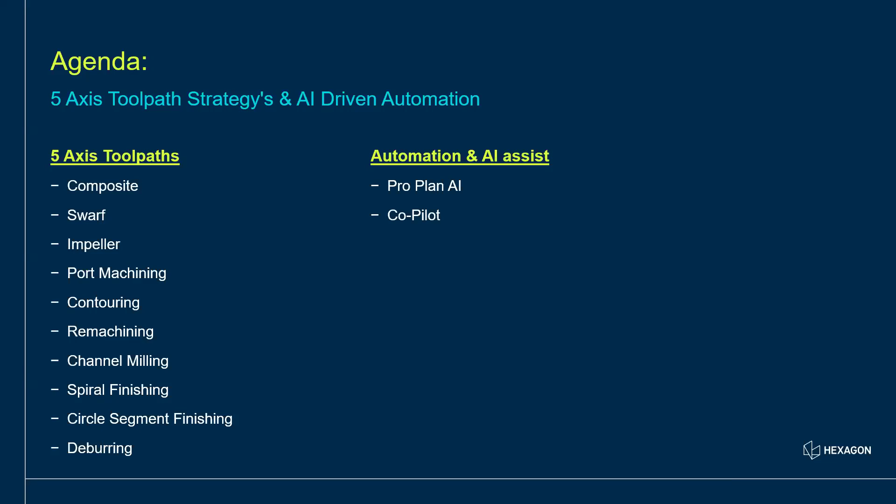ESPRIT EDGE will have a version every year. We used to update 3 to 4 times about the versions. So already we have released 2026.1. This is the latest update, 2026.2.

This is Copilot Execute. It will extend the Copilot capabilities beyond recommendations and subject matter expertise, and it will enable the execution of ESPRIT EDGE commands using natural language prompts. For example, if you want to import any 3D model or any fixture, if you just type it, it will directly go to the particular location and import the model into the ESPRIT EDGE environment. These are just some basic examples—there are a lot of functions in the background. This is the basic thing I just explained, how Copilot is working, so that people can understand easily.

Okay, this is how Copilot is going to help them. There are a lot of search terms we used to do when creating programming, but this Copilot is really helpful, and it will save a lot of our time.

The benefits of this is it will reduce the learning curve for new programmers, and also accelerate the part programming. The main criteria is who needs it. New ESPRIT EDGE users unfamiliar with the part workflows can start using the Copilot and get things done sooner, without needing to search here and there. It also helps experienced users seeking enhanced productivity. If they're doing programming that normally takes 30 or 40 minutes, using this Copilot execution, they can reduce the programming time drastically by 50%. In that perspective, it's really going to help them.

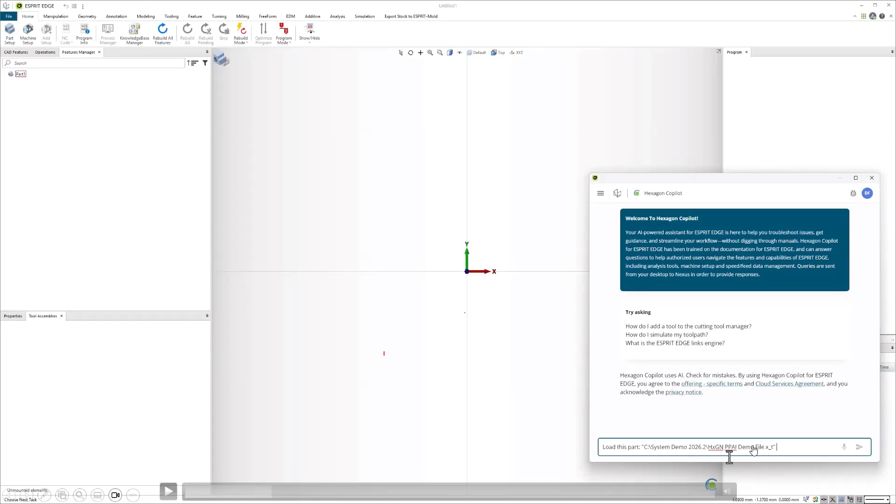Here you can see there is a message we are going to type: load this part, and we are just giving the location. So you don't need to go to the part, you can just give the location and load the part. You give the program file location, and once you give that, it will directly go to the location and import the model into ESPRIT EDGE.

Yeah, you can see here. So these are all some basic things which can be helpful for new programmers or experienced programmers to enhance their productivity.

And also you can do further executions. Set the nexus material for part 1, aluminum. We have some automation inside based on the material selection. If you type those commands, the background execution will start happening, and within maybe 40 to 50 seconds, the next execution will happen. It depends on the query, what we wanted to exactly achieve. In case there are sub-questions, the AI Copilot will ask those questions and we will answer them.

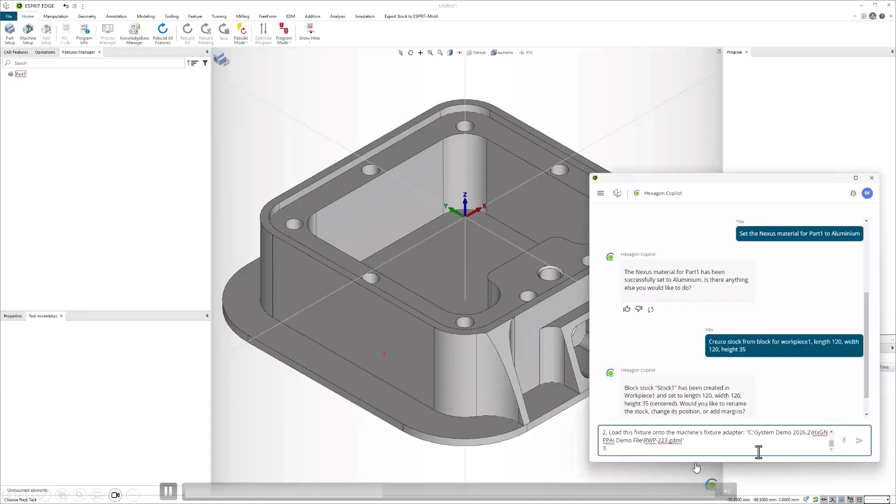So we are just typing: load this machine, load this fixture, everything. We are just typing and giving the location. Once you give everything, this is the command prompt we have given to the Copilot, then automatically the execution will happen. Yeah, this is how it will work, the Copilot will work.

And also you can upload the workpiece, and also you can upload the fixture, everything, stock material.

So far we have seen the Hexagon Copilot features. Whatever commands you enter, based on the commands it will do the execution at the back end and you will see the result.

The next thing is run ProPlan AI. ProPlan AI is an automation AI assist. Based on the database or the best strategies available in our database, ProPlan AI will help implement the strategies. The only thing required is feature recognition. ESPRIT EDGE has a feature recognition software, so it will recognize the feature from the 3D model, and based on the 3D model, the execution will happen. I will just show you that.

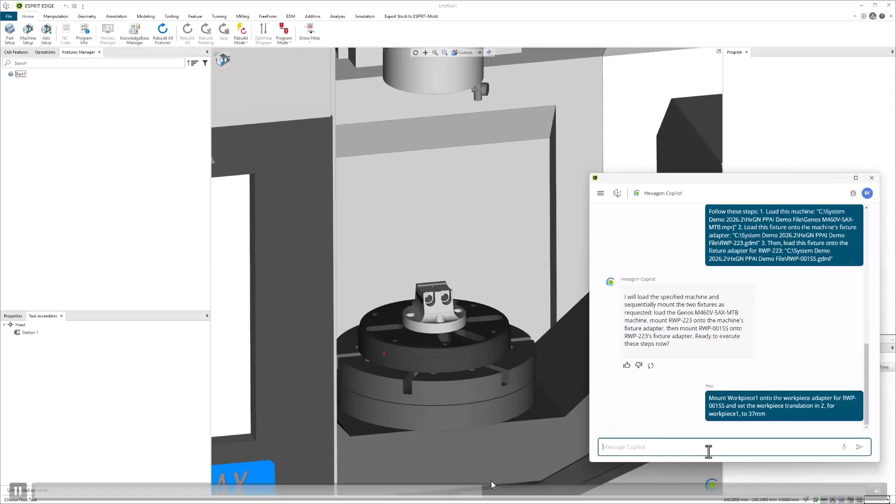Once the workpiece, fixture, machine, everything is set, we can ask any questions like create a pocket feature with the face selected, and create a wall feature with the side face selected. Any question you ask, it will do that automatically. You don't need to do it completely manually. In case you get stuck somewhere, this Copilot will definitely assist you on what to do next. So in that perspective, it is kind of our first point of contact to get immediate support.

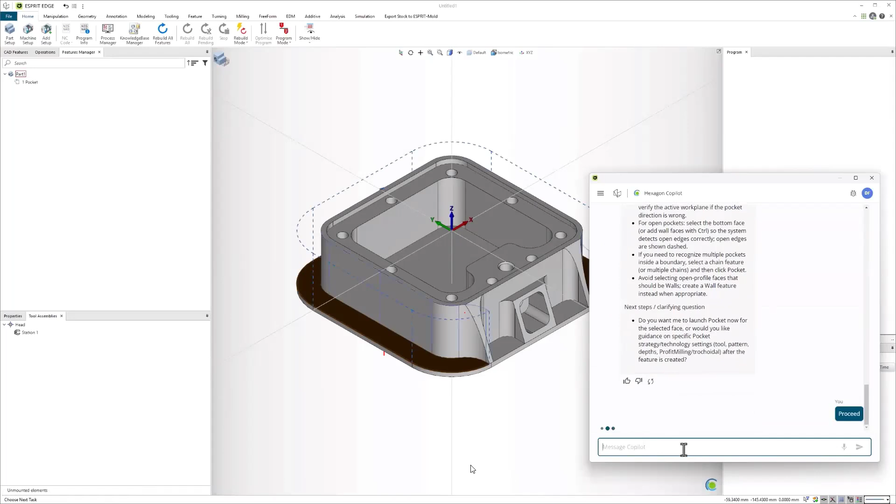So now the feature has been created, some pocket feature. We have given the options in the Copilot, and Copilot has helped now create the feature. Now we are saying run ProPlan AI on the selected features. ProPlan AI is an AI automation inside ESPRIT EDGE. Once you run ProPlan AI on the selected feature, it will work at the background and the toolpath will also be generated automatically. In this section, you can see the toolpath has been generated on the left side also - rough general pocket and finish general pocket. So roughing operations as well as finishing operations have been generated over here.

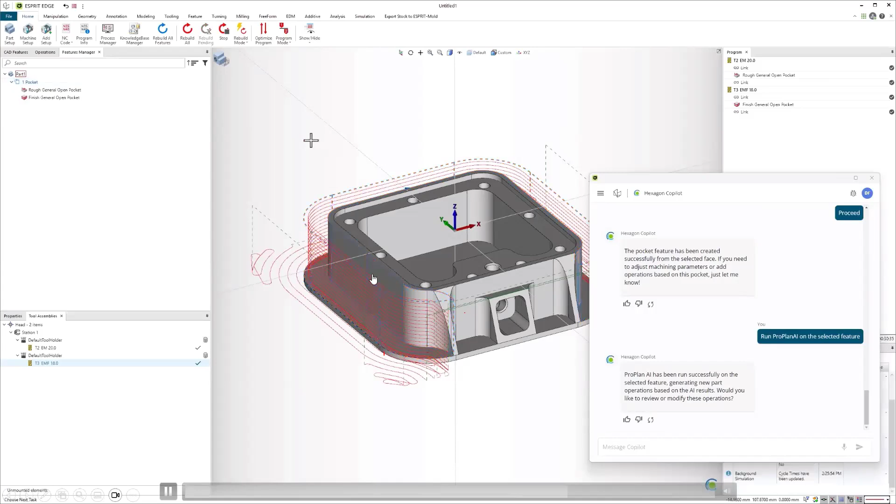Then you can directly create the toolpath. You can see this process from the initial to the final toolpath and then the simulation stage. So nothing has been created manually.

So it is like, you are importing the part, importing the fixture, selecting the tool, creating the feature. Everything happens based on the commands you have entered in the Copilot. So this is how the ESPRIT EDGE automation of ProPlan AI and the Copilot will work together to get it done without any manual intervention. The only thing is we should know what we have to achieve. Once you are clear with your strategy, you can execute the same in the software itself.

So you can see the simulation after that. In case if there's any changes required, you can edit the toolpath and do that. Since it is already a proven database, you don't need to do any NC code. After this, you can type like, post NC code for this post and save it in this particular location. We are giving the location for the post also. So it will directly go to the folder and then select the post processor. And finally, it will generate the NC code like this.

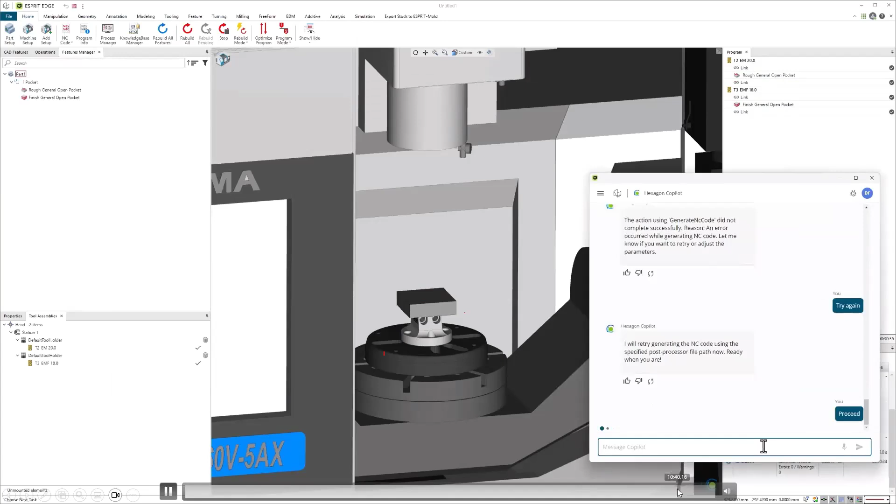So this is completely a workflow of the ProPlan AI and then Hexagon Copilot, how it is really going to be helpful to reduce the manual intervention. And even though if we get stuck somewhere, we can use the Copilot. This is the thing I wanted to execute. So they will give some suggestions, and based on that, we will continue our programming.

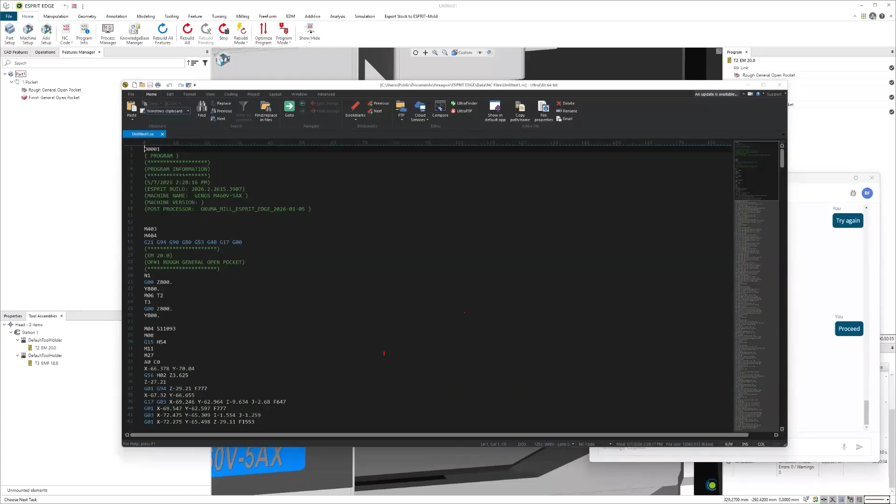So these are some features, some advantages we have in ESPRIT EDGE 2026.2. Optimization of cutting conditions and then 5-axis composite new patterns. We have that dynamic cutting condition - we have introduced the dynamic cutting optimization. It will adapt the cutting conditions to the machining context. For example, it brings shorter cycle time and better tool life.

Already in ESPRIT EDGE, we have the feature called profit milling. The profit milling will remove more material and it will reduce the cycle time and also increase the tool life as well. Similarly, in cutting conditions there is optimization based on the surface, based on the profile - the toolpath will get automatically changed.

That is what we have introduced in the latest version of ESPRIT EDGE 2026.2. And also when it comes to 5-axis composite new patterns, this update introduces 3 new machining patterns that expand the range of part-driven toolpath, enabling simpler workflow and greater control. Sometimes we used to have contour variable offset, open flow, central pass variable offset.

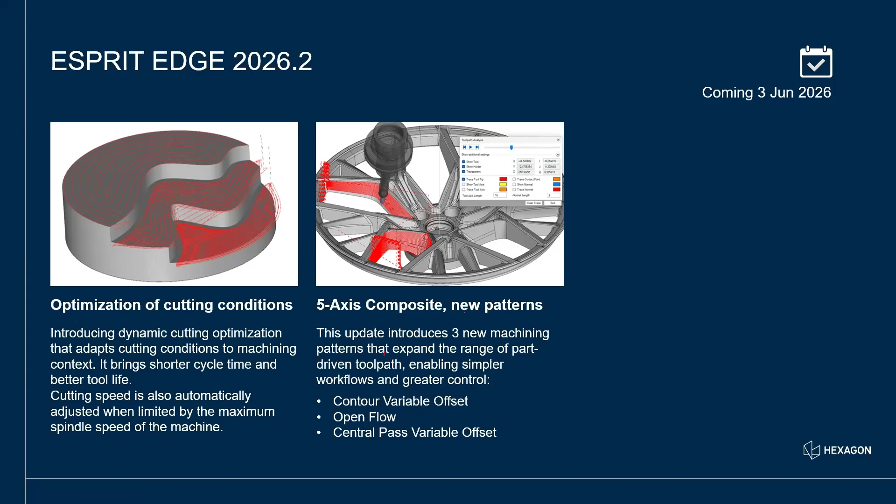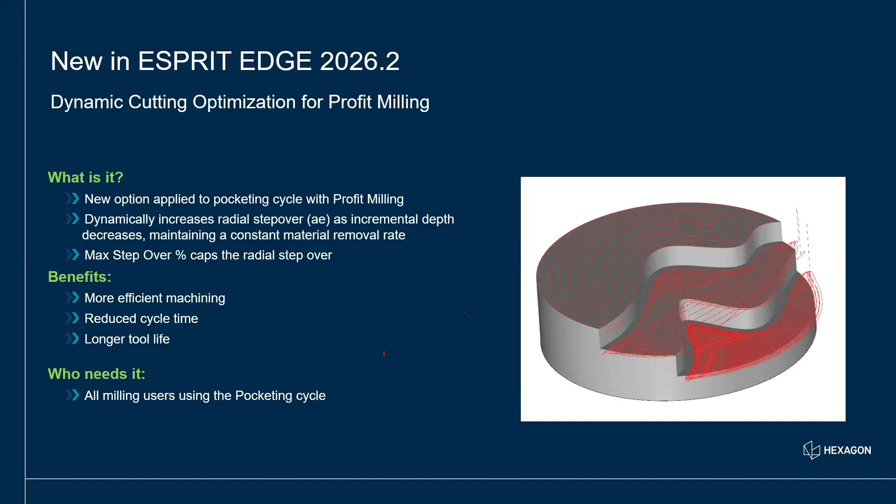And this is the dynamic cutting optimization of the profit milling. I just explained this, what are all the benefits you can get. It will generally give more efficient machining time, reduce the cycle time, and give longer tool life. I just explained this, so let me go on.

And the same way for this 5-axis composite with the new open flow and hybrid patterns.

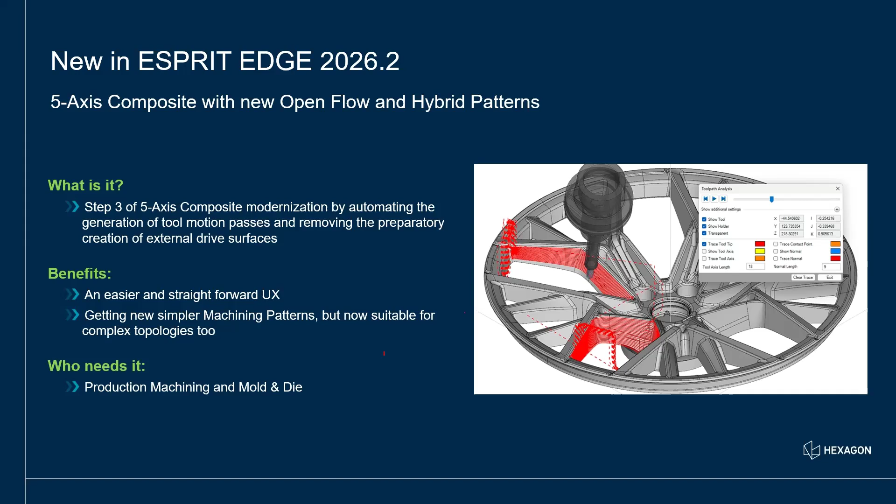So now we have seen so far about the ESPRIT EDGE new features, what is available, and how it is going to help them. As I mentioned in the first slide, we have different 5-axis strategies, like channel, swarf, and impeller. I will show some workflow and ESPRIT EDGE files, so that you can easily understand how it is easy to create the programming, and how the expected toolpath also you can easily achieve through these options and features.

So this is the software UI UX interface. I'm just going to load the part.

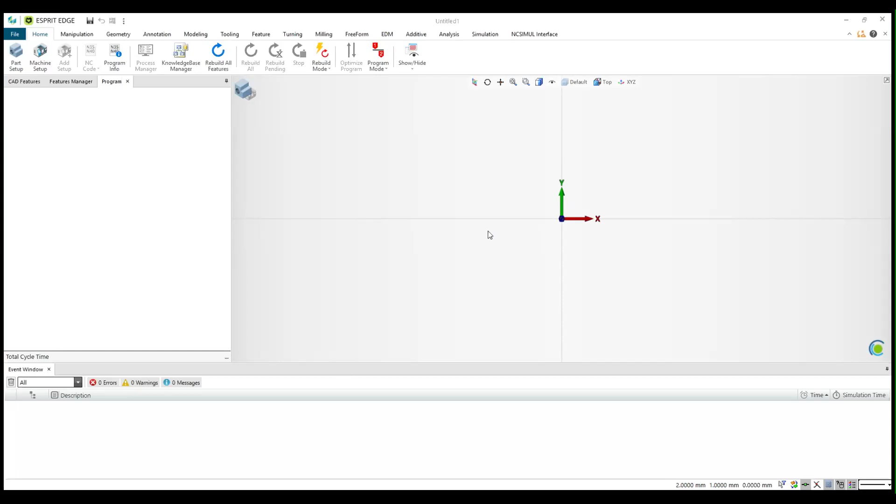So this is the ESPRIT EDGE UI UX interface. Let me open one part. Okay, channel roughing.

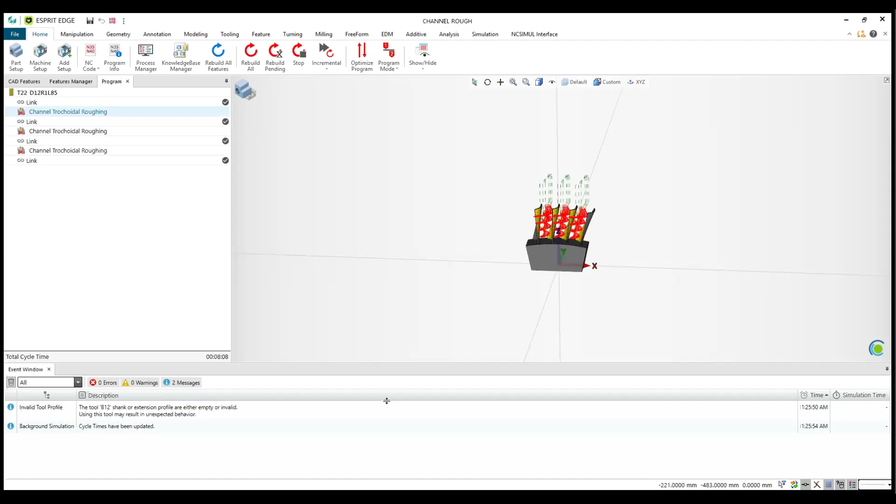So this is the one part which already has the toolpath created. If you see at the top in milling, we have individual operations like facing, pocketing, contouring, and deburring. These are all some basic 2-axis and 3-axis profile operations available inside ESPRIT EDGE. When it comes to free form, mostly these are the options useful for 5-axis machining. At the top here you can see composite milling, swarf machining, 5-axis contouring, remachining, channel milling, impeller, 5-axis spiral finishing, and we have both roughing and finishing. Similarly we have port roughing and port finishing, circle segment finishing, and deburring. These are all dedicated cycles available for 5-axis.

So whenever we want to do any 5-axis part, this will cover almost 100% of that machining requirement, because mostly when we are doing an impeller part, you can directly go to the impeller option. When we are doing a channel, you can go directly to channel milling. So if you take this part, this is channel milling. In that channel milling, we have roughing operations and also finishing operations. So first we have done the roughing operations.

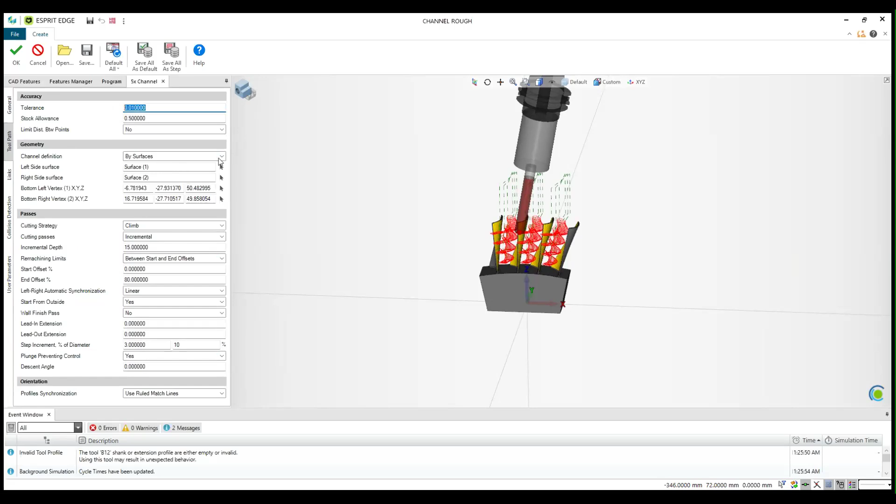So basically we need a surface to create any toolpath. For that, to create a surface in ESPRIT EDGE, we have options to create any surface. With that surface you can select the area, by ruled features or by surfaces - you can see here that yellow color, we have already created the surface. With that we have created the toolpath. And the links - link is like how you want to approach entry, exit, and what clearance you want to have. And if there is any collision, tool detection collision also you can activate. And if there are any user parameters, that can also be added.

So this is completely inside a strategy. If you select any particular toolpath strategy like channel milling, you have all these multiple options, but very minimal input. So the main advantage of ESPRIT EDGE is you can use minimal input to achieve your toolpath. It's not much complex like other softwares I used to use. So you want to do channel milling, you can directly go to the channel milling options and enter that data. But we have some criteria before that - you have to create the features.

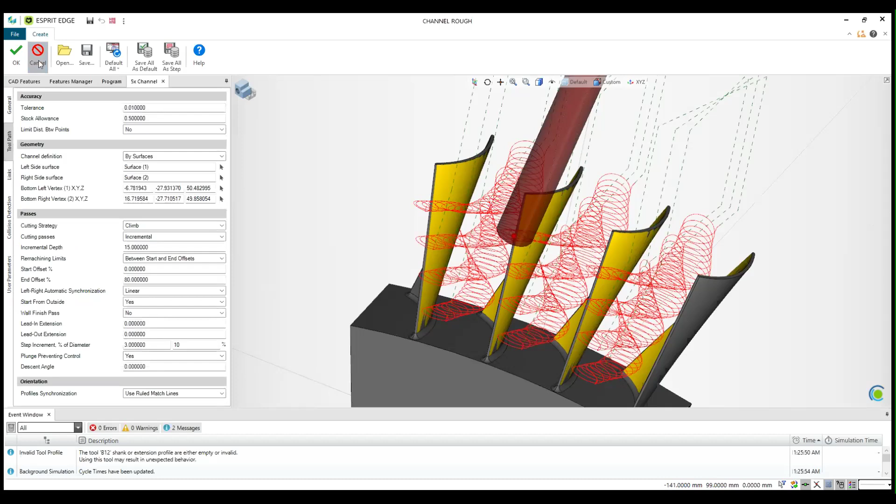But those things are very easy, not much complicated. There is an option in the geometry or modeling section. Here, whatever features or surfaces we want to create, we can easily create. Even for surfaces, we have a lot of options to create them. So from that perspective, toolpath creation is very easy, and quickly you will get the required toolpath that you wanted.

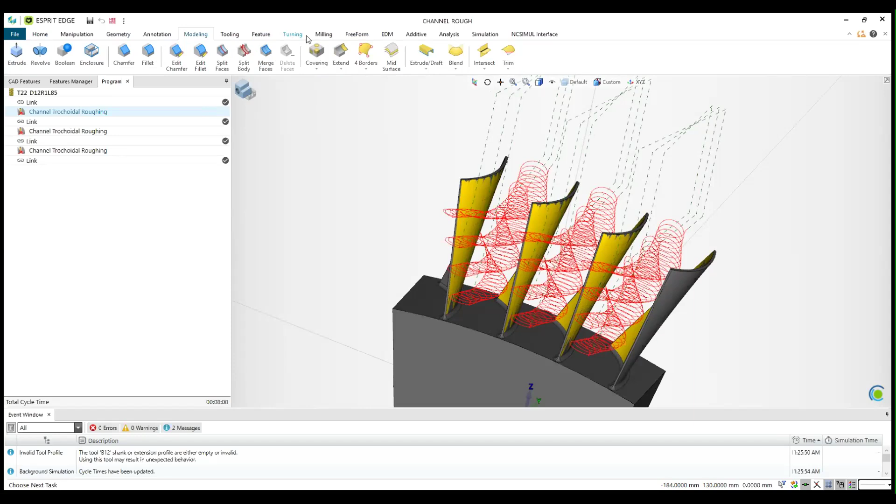So channel milling, as I said, I just went and selected the channel milling. I entered all the parameters, whatever is required, and once you click OK, you will get the toolpath and the simulation.

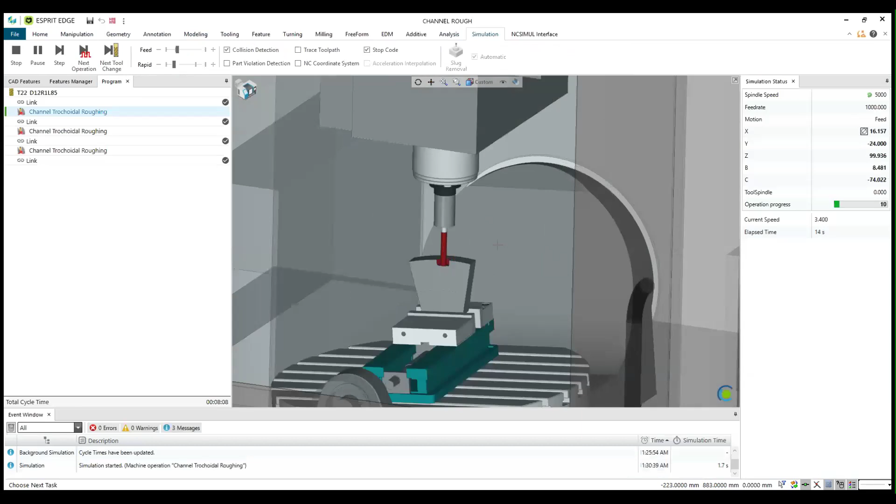Let me click the simulation. So the graphics of ESPRIT EDGE are also very clean. You can see the real, clean and perfect toolpath simulation.

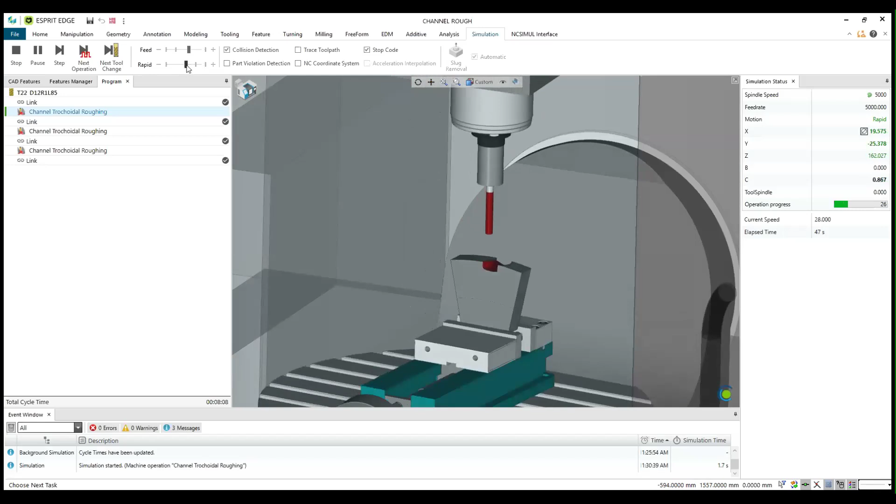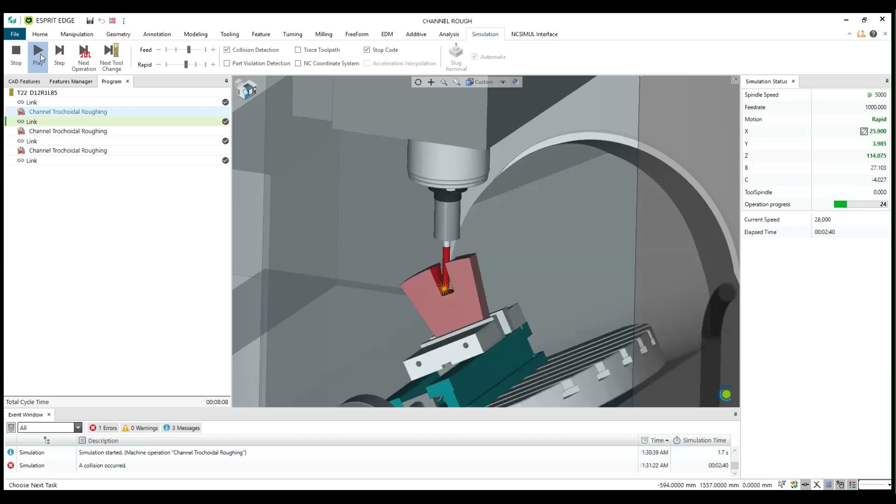Another plus point for ESPRIT Edge is that we have a post-processor library. Generally, if you want to create any toolpath for newer machines, the CAM provider has to build the post-processor, and if there are issues or modifications needed, they have to work on it. But in ESPRIT, we have dedicated post-processors available in our library, more than 30,000 already available and ready to use. No modifications are required. You can directly download from the portal and start using that post-processor.

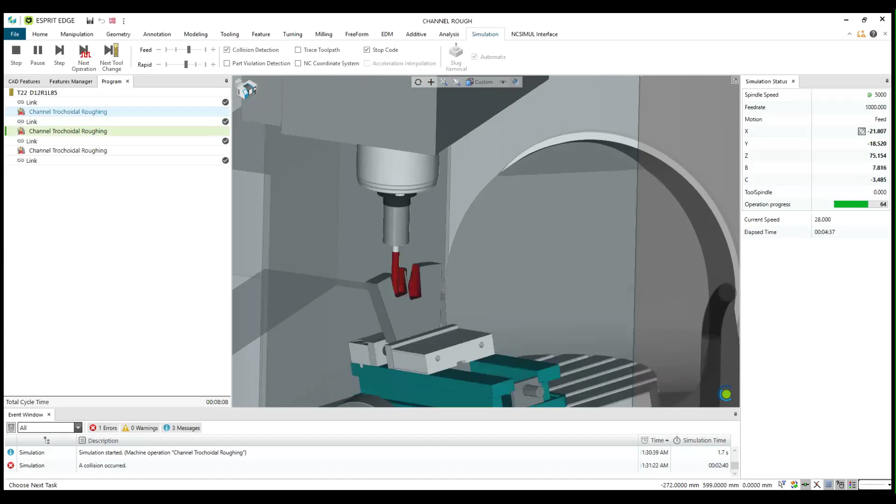So right now we have seen some collisions. If there are any collisions in the toolpath, we can easily see that and go to the strategy to modify it. You can see here at the end. So you can directly go to the toolpath and modify it to avoid that.

Let me just open another part. This is the impeller milling, and this is a 5-axis machine program.

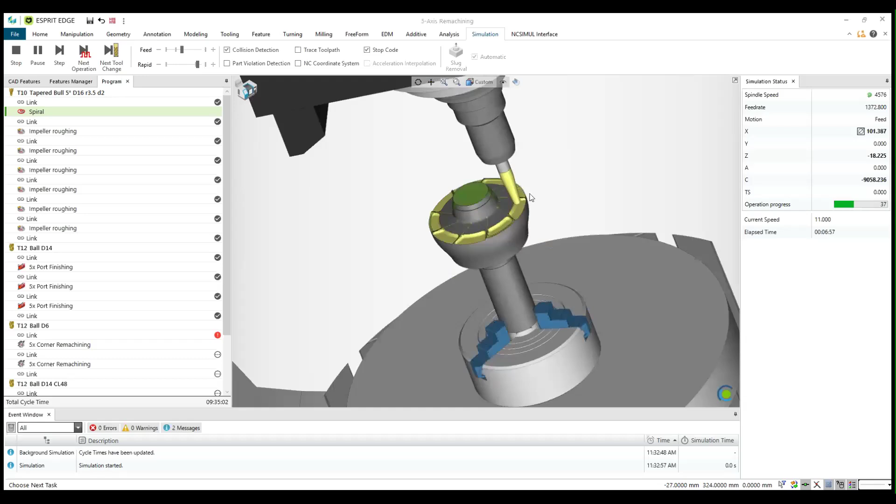You can see this profile, and the toolpath which is created for it is not quite easy, but in ESPRIT Edge we make it easier and it's able to achieve the surface finish too. Toolpath creation isn't the only thing that matters, but how the toolpath really helps achieve a better surface finish — that's very important.

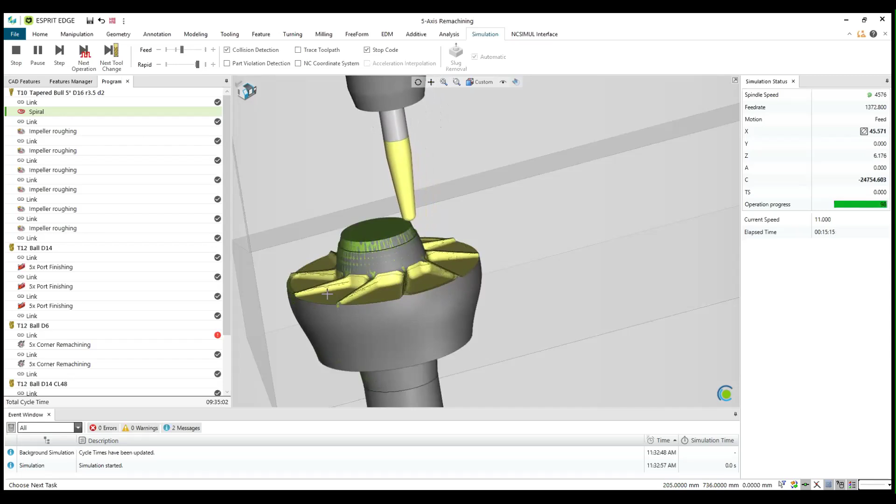When you have direct options for impeller, blade, or port machining, using those direct cycles instead of other 5-axis roughing cycles will really help you achieve better results.

Most of the time we used to struggle a lot with creating work planes. But in ESPRIT Edge, the work plane is created automatically based on the feature or the machining side you want to create a toolpath for.

You can use your complete 3D tool holders, and any special form tools or barrel cutters can be created inside ESPRIT Edge, or you can use the 3D model so you can compare the same output to what will really happen on the machine. If you use a different tool here than what you use on the real CNC machine, it won't be the same comparison. So whatever holders, tools, or inserts you'll use on the real CNC machine, you can create the same in ESPRIT Edge as well.

You will also see the toolpath simulation, so that we don't get any surprises during the real CNC machining.

I'm just showing you these toolpaths and simulations. The thing is, whatever complex parts or complex profiles, ESPRIT Edge really helps achieve those areas and reduce your programming time. We have done most of the impellers, blade machining, and port machining — a lot of projects along with Kennametal and Seco. ESPRIT Edge has strong toolpath strategy creation, and the output is amazing, with really good finishing.

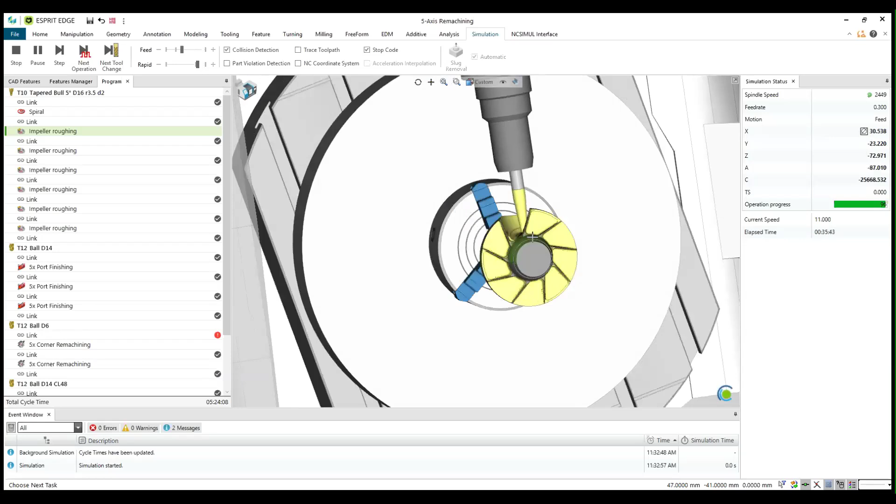I will just open the cycle. So the cycle edition, and these options, the strategy editing also — it's very easy, not much complicated. You can create the toolpath with respect to the 2D feature, 2D profile wireframe, and the 3D wireframe or 3D surfaces. We can extract everything from the 3D model and start creating the toolpath with those options.

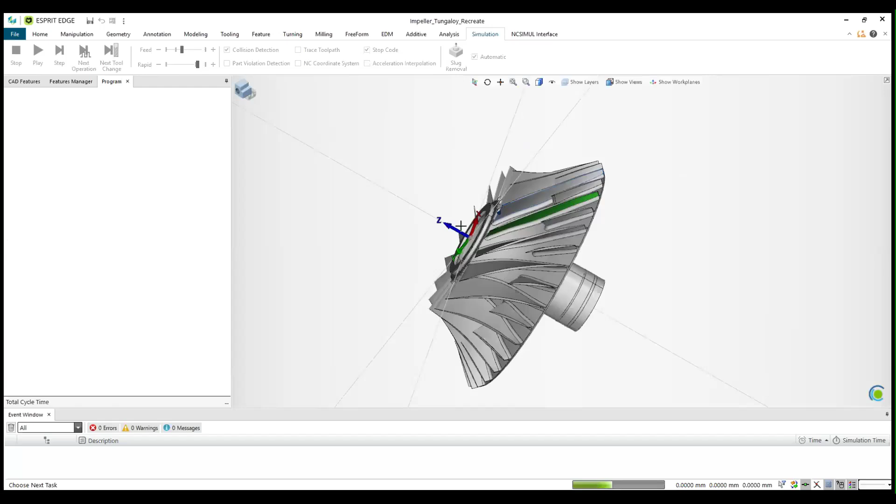Let me open one impeller part done on the Grob machine, G352 machine. So now you can see this - it has very close blades, and the pitches are also very near. So this is a tricky part, not an easier part. We have to achieve very thin surfaces with the profile, and it's not a straight one, so it's not an easy job to achieve.

So in ESPRIT Edge, we have the option in free form that is directly for impeller machining. With that option, you can just select the curve, guided curve, or the ruled feature, and create the toolpath.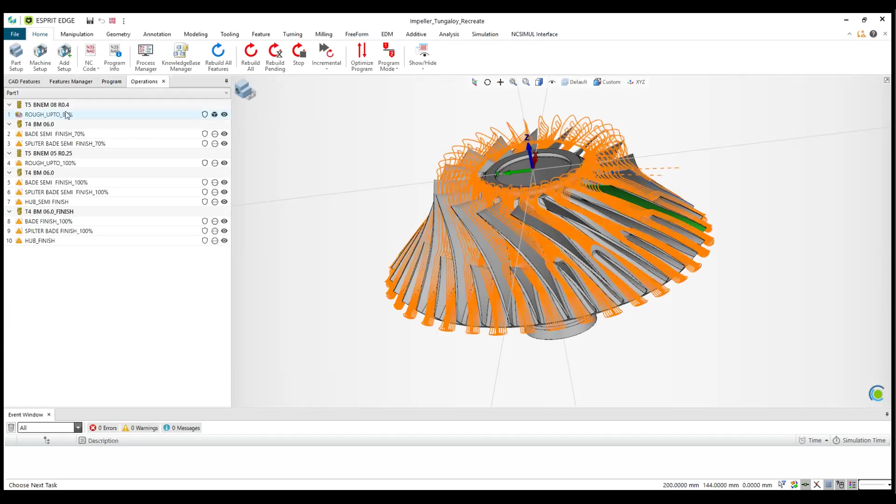Let me just show the simulation over here - operations. So this is a complete roughing, semi-finishing, and then this is for a splitter, this is for blade, this is a splitter, and this is the complete inner area finishing, semi-finishing, finishing. So you can create whatever toolpaths you need for any kind of impellers. We have the ready-made solution available to do that.

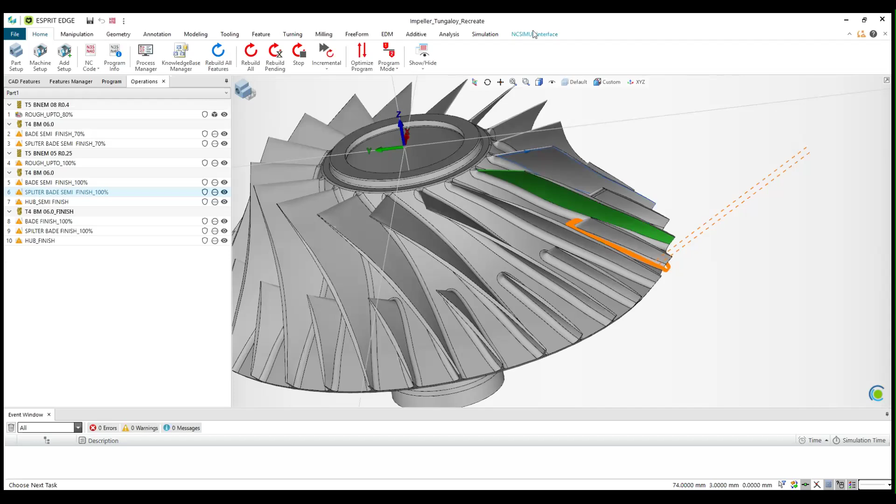Let me just show one simulation for that. I'll make it a little bit transparent.

So on the right side, you can see the spindle feed rate, and whether the motion is feed or rapid, and the XYZ motions.

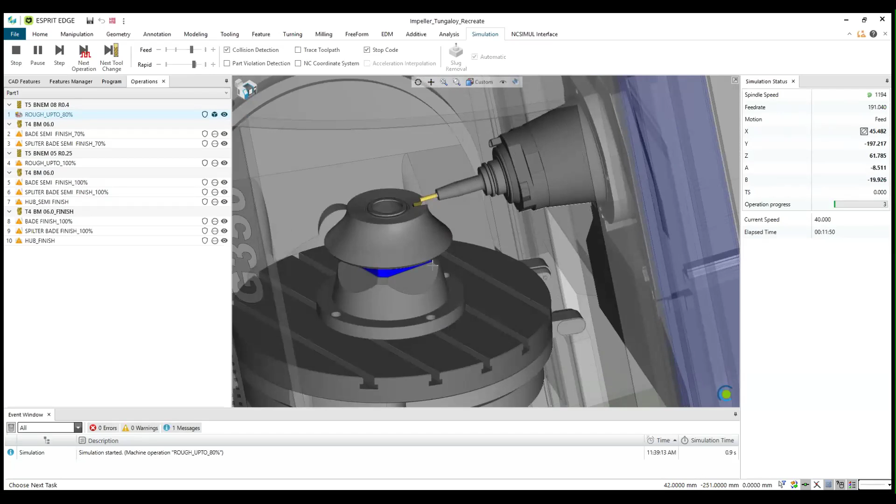So this is a complete roughing toolpath. It will do all the blades, whatever the number of blades it has. I just wanted to show the toolpath and the simulation, how you can easily create and view it in ESPRIT Edge.

So the main intention is we wanted to show what are the capabilities of ESPRIT Edge, and what options are available inside ESPRIT Edge to get your 5-axis toolpath done very easily.

And one more thing - ESPRIT Edge is not only for 5-axis, but also for multitasking machines, when people are having double turret machines, double spindle, main spindle, sub spindle, lower turret, upper turret. In that perspective also, ESPRIT Edge is very strong when it comes to toolpath creation, and also the post processor.

Because in our library, we used to work with all machine tool builders. Our ESPRIT post R&D team will work with all machine tool builders like DMG, Mazak, whatever the global providers, and also the Indian machine tool providers.

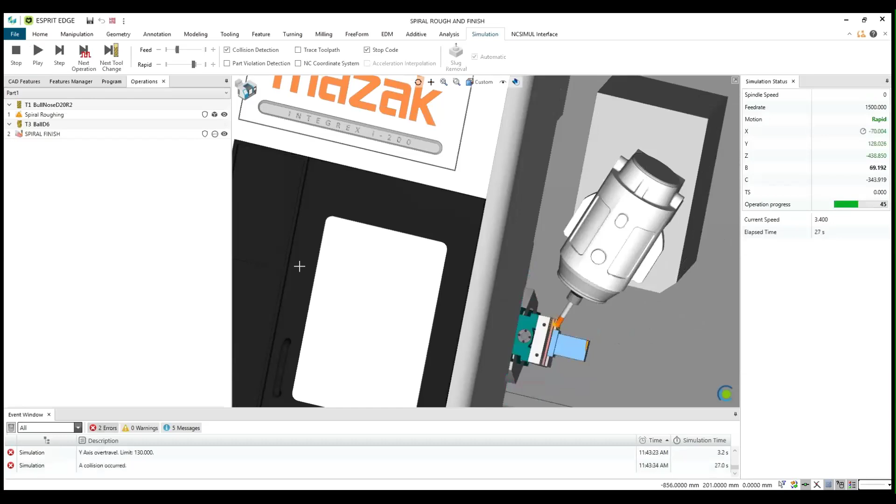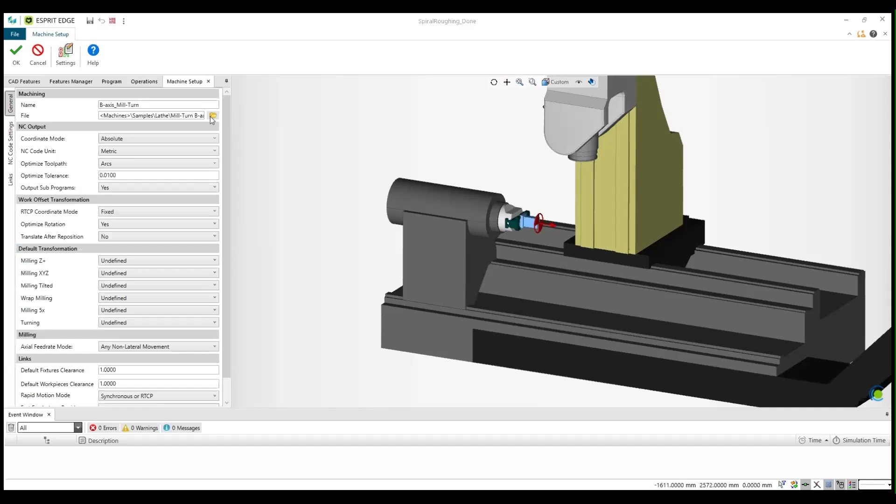So this is one of the Integrex parts. Let me change the machine - this is a sample machine which we have. So I will change this machine to Mazak Integrex i200. So far we have seen that vertical 5-axis and horizontal 5-axis.

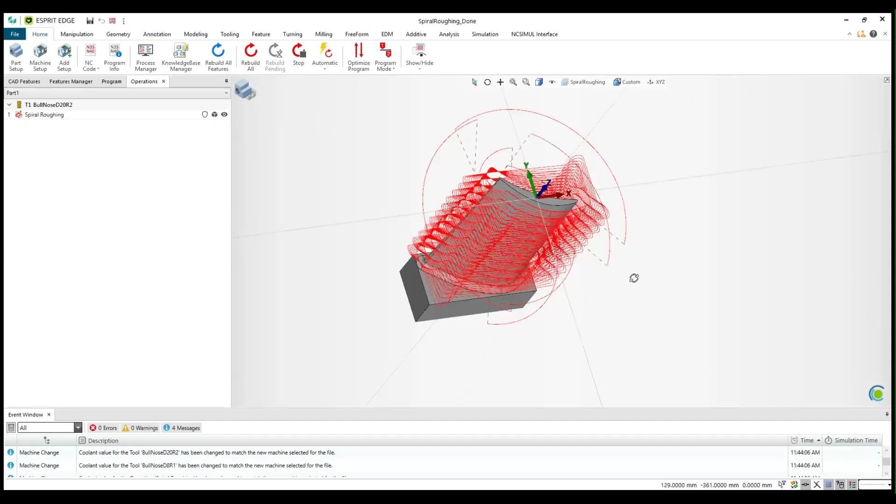This is the Integrex 5-axis toolpath. I just wanted to show this different variant as well. So this kind of blades, single blades and multi blades - many 5-axis customers are using that, so to create the toolpath.

So with that spiral roughing, we can easily create it in ESPRIT Edge. So this is a complete simulation - you can see the settings, everything. I will just show the simulation.

So these kind of toolpaths, when it comes for that, you can directly go to spiral roughing, because the spiral roughing image itself will clearly explain it to you. So this is especially for this kind of profile.

So there are a lot of self-learning tools available inside the ESPRIT Edge options. Even you can go with the help option also, which will give you a lot of things. Anyway, the customers who are already using our software might have those help documents with them.

And along with that, the new feature I mentioned - the ProPlan AI and then the Copilot - this is also going to enhance their productivity and reduce the programming time. So this is the new benefit that is really going to be helpful for them.

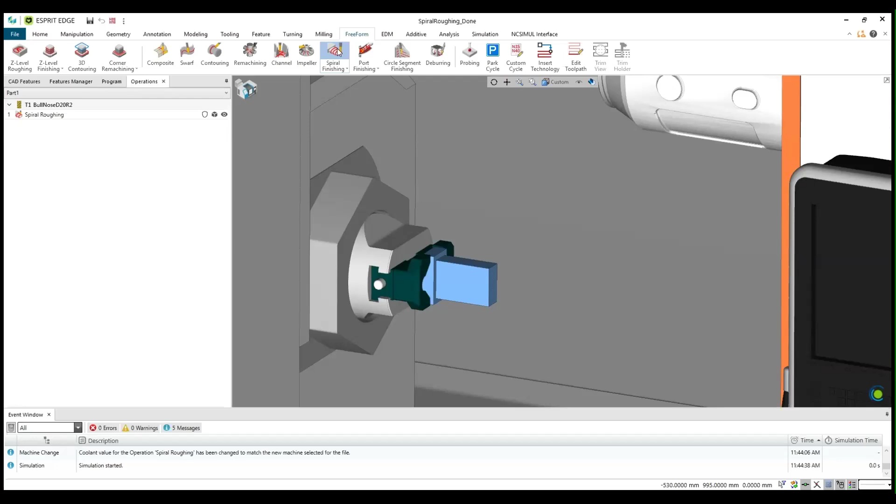And apart from that, we wanted to show one more product called NCSIMUL. So NCSIMUL is basically a G code verification software. So let me just stop sharing the screen.

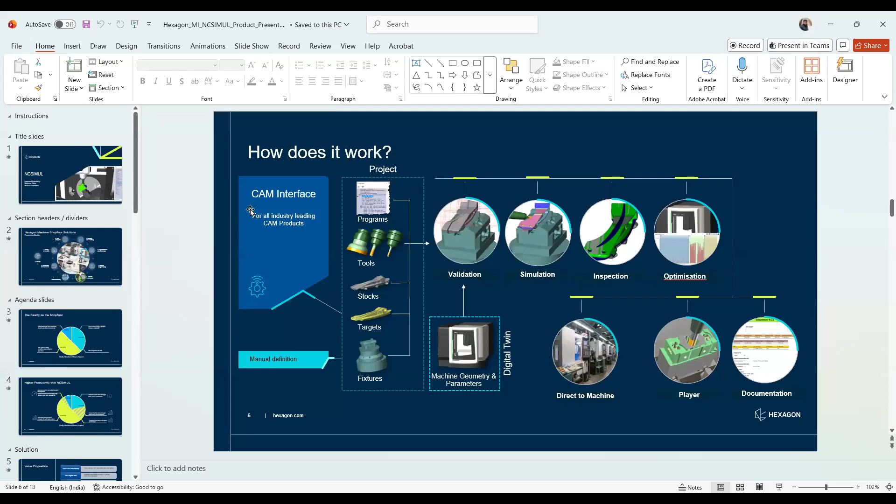So far we have seen the ESPRIT EDGE toolpath creation software, and what are all the advantages over 5-axis machining. When you have parts like impeller, port machining, channel, or spiral blade, whatever parts you are having, how you can easily create the toolpath, and how it is going to help you reduce the programming time.

The second software we are going to discuss is called NCSIMUL. This is basically a G code verification software. So generally we have a thought: why do I need separate software for G code verification if I'm going to check the simulation in the CAM software itself?

Whatever toolpath we are creating inside the CAM software, the output we get is a G code, and that is the input we provide to our real CNC machine. In case there is any issue or single line error in the G code, that will directly affect our machining. It may cause an accident or tool breakage, and so on. There are so many parameters, so it is always a safe process to validate our G code so there won't be any issues during the real machining time.

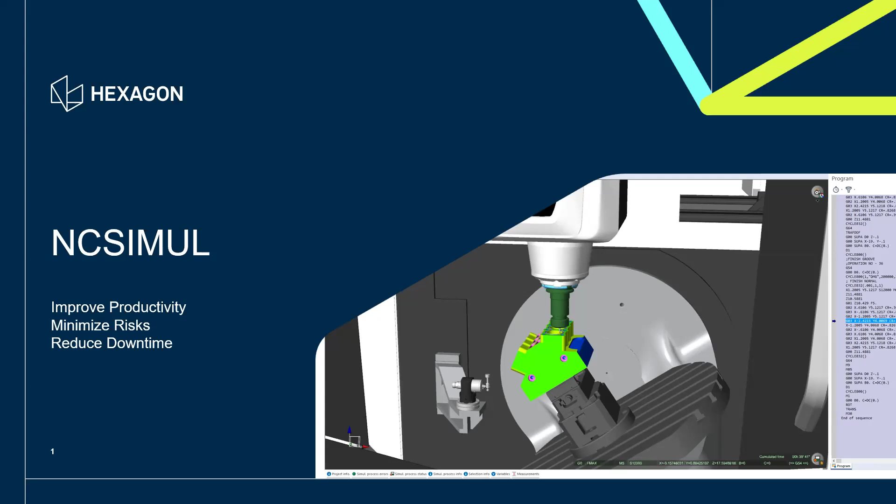Now we talk a lot about digital manufacturing, everything is digital, but why don't we save our machine and our tooling before we press the cycle start button on the CNC machine? In that perspective, NCSIMUL is really going to be a bridge between the programmer and the operator. Both of them can validate their program before they start the CNC machining. Basically, it will improve the productivity, minimize the risk, and reduce the downtime.

I will take a quick note on the best advantages, and I will also show the interfaces between NCSIMUL and ESPRIT EDGE and other CAM softwares. This is the general reality on the shop floor, how every day they are spending machine hours. Sometimes inaccurate cycle time estimation, sometimes it occupies valuable machine availability, and suboptimal cutting conditions lead to wasted time. These are all the daily machine hours spent in our shop floor every day.

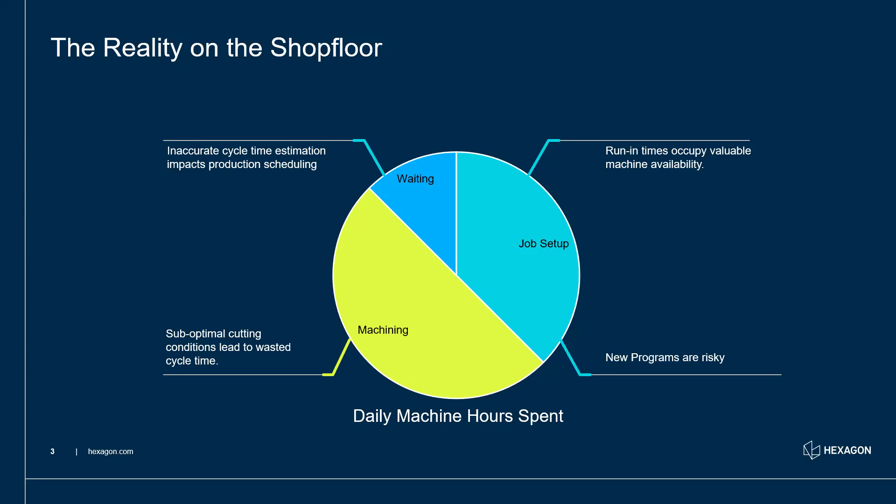So how does NCSIMUL help increase productivity? It will increase the parts per hour through toolpath optimization. In NCSIMUL, it will not only validate your program, it also has an option called optimization that will definitely reduce your program cycle time, and you can minimize the risk to prevent production issues, because if you find errors before the real machining happens, you can save a lot of time, and when time is saved, obviously it saves money as well.

You can reduce the waste from damaged parts, tools, or machines. Suppose an issue could cause an accident in your machines; if you find it before it runs on the real CNC machine, you can save your tool, parts, and even the machines, because a machine is a capital investment. Nobody wants any errors, so this really safeguards your real CNC machines.

You can reduce setup times through better shop documentation, and also reduce run-in times for higher productivity. This software helps safeguard your machine and reduce your setup time. If there is any new part you are going to prove, you can reduce the part prove time as well, and also reduce the cycle time. These are all the major things we have to focus on for why we need NCSIMUL.

So there is some value proposition we have: universal compatibility, a true digital twin, and faster time to part. It will eliminate the prove-out and reduce setup and cycle times. It will maximize machine uptime and operator efficiency. Whatever data we have to take, it is data-driven decisions—we can analyze these documents and take action. And it's a scalable integration, seamlessly connecting with existing CAD/CAM and PLM workflows.

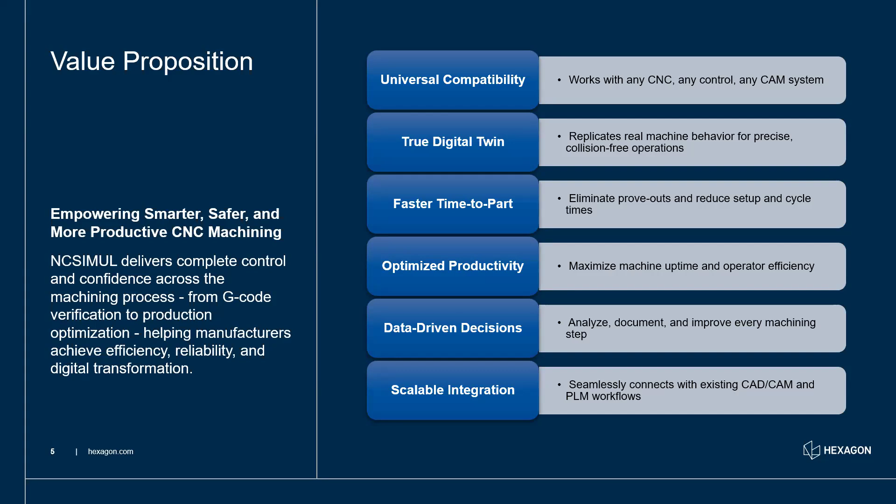Now we may have some questions. For example, I'm already spending 1 hour in my CAM programming time—if I add one more software, how much more time do I need to spend? In NCSIMUL, you don't need to create anything new from scratch. Basically, we need data for NCSIMUL, like a CAD model for your part—you can show it over here.

Your part model, stock model, fixture model, tool library, NC program - this is the data required to create any simulation project. So from where we can get this data? Because we have already created or used all this data in our CAM program, CAM software.

So we can get the data from the CAM software with the help of interface. I will show one small demo how the interface is going to take the data from your existing CAM to NCSIMUL, so you can easily understand that. And once it gets the data, only the machine we will build from the NCSIMUL.

We have to add it, and it will validate, simulate, and do the comparison, and you can do the optimization as well. So once it is done, you can directly send the program to the shop floor without any hesitation, without any fear. Because a lot of programmers, even though if they create the program and checked anything, they may have some fear inside that the program has to be proven without any error.

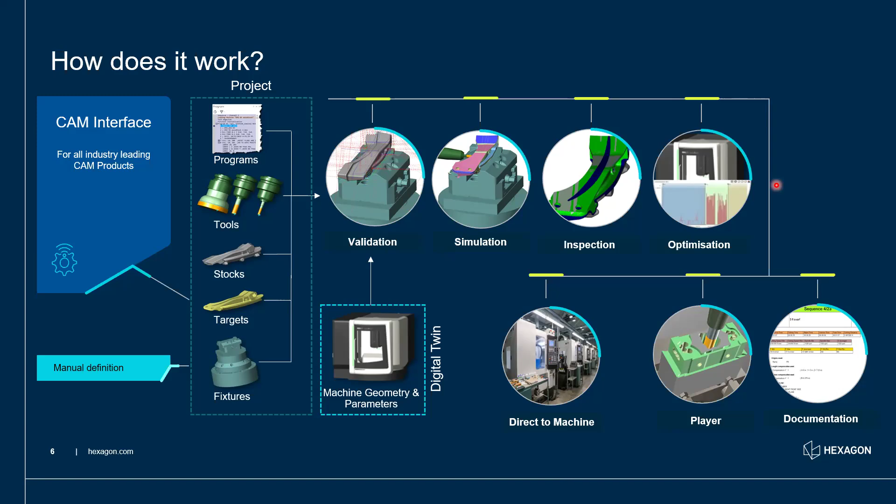So this software will give the confidence to the programmer, and also give the clarity to the operator - how if I press the cycle start, how my tool change is going to happen, how the first operation completed, what my part will look like. So everything will be visualized before they do it actually. Digitally verify everything before you go to the real world. So this is how the CAM interface is going to work.

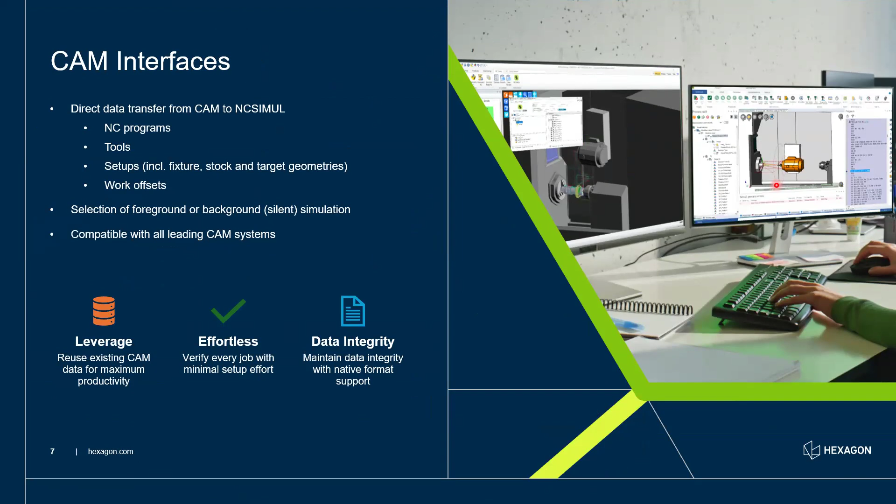NCSIMUL has interface with multiple CAM softwares, almost like 15, 16 softwares - along with Hexagon, ESPRIT EDGE, EdgeCam, and WorkNC. So along with that, whatever other softwares we have, it has a CAM interface with that.

So what I will do now, let me just show you one simulation interface along with ESPRIT EDGE and NCSIMUL. And you can see what is the real simulation which is going to happen in your shop floor.

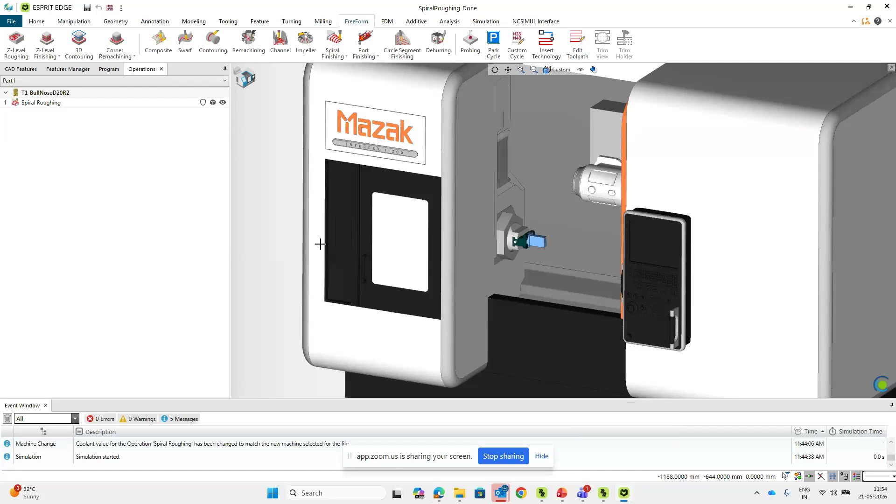I hope my screen is visible. Okay, so now you can see this one spiral roughing operation is there. So we have a fixture, we have the stock part, and we have the finished part. Everything is here. You can see here there is an NCSIMUL interface at the top, so it will come in all the CAM softwares. Once we install the NCSIMUL software, the NCSIMUL icon will come inside the CAM software.

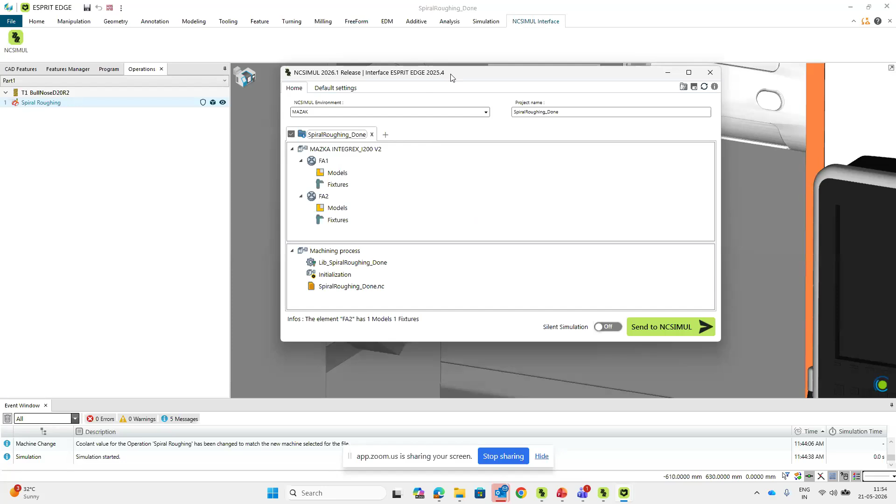I just click that NCSIMUL interface. This is the interface screen. This screen is going to help us export the data from ESPRIT EDGE to NCSIMUL. Here we can select the folder in which you have machines.

So now I just select the folder, and you can give any project name, and select the machine - the model is selected automatically, you don't need to select manually. The fixtures and the part model, stock model, everything is automatically detected. And the tool library also.

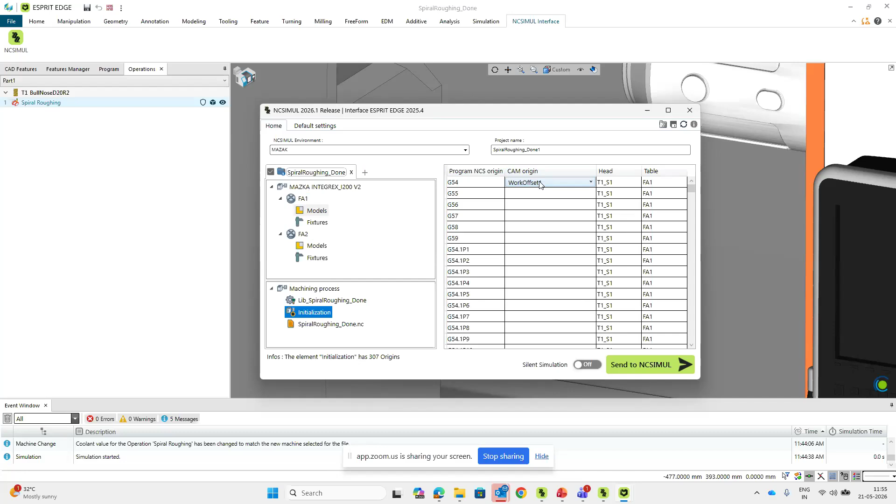So whatever tools you have used, you can directly export the tool. You can export your work offset data and program. So once you set everything here, you just need to select send to NCSIMUL. That's it.

So here you can see the data export is happening. Yes, it's done.

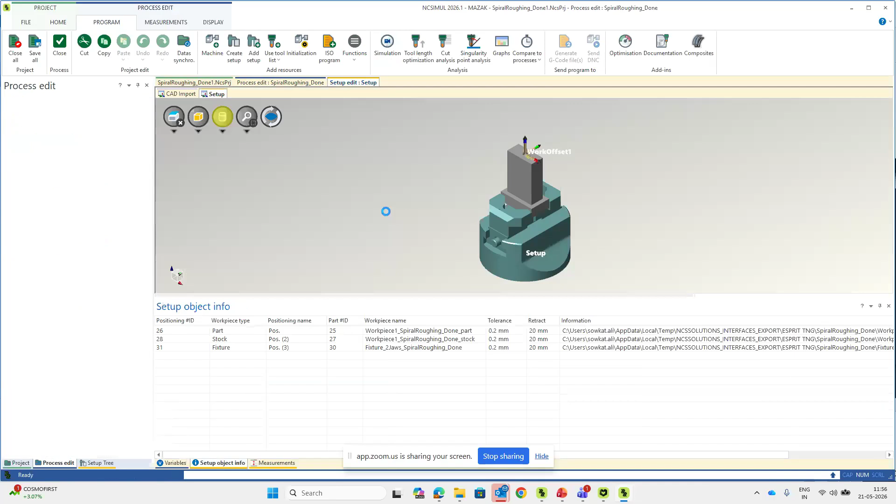So you can see this machine is from NCSIMUL, but rest all data is from ESPRIT EDGE. If you go to the setup, this is the part we have extracted - fixture data, this is our stock, and this is our part, including the offset. Everything has been exported from CAM. We have not exported anything manually.

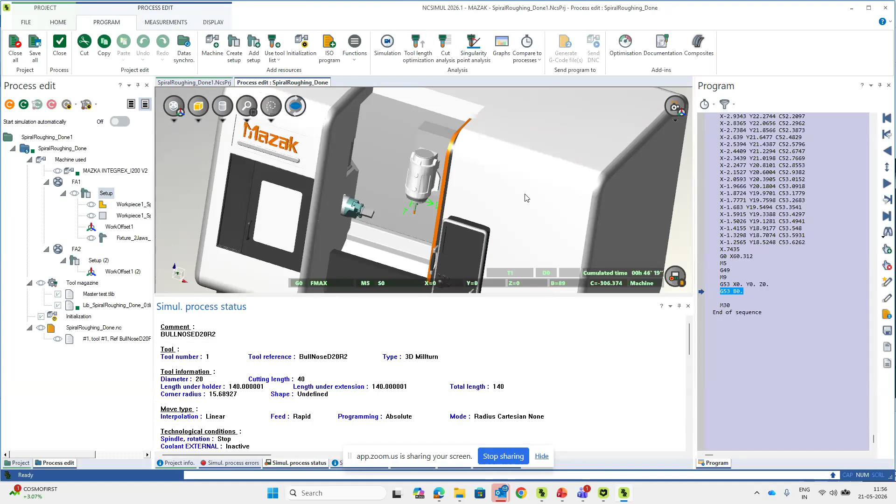So you know the time how much it took to export the data. Sometimes if there are bigger parts, it may take a little bit, but it may not take more time, like 30 minutes or 20 minutes like that. It will take some time, but it will quickly transfer all your data. This is the part model, stock model, fixture model, and also I would show the tool library.

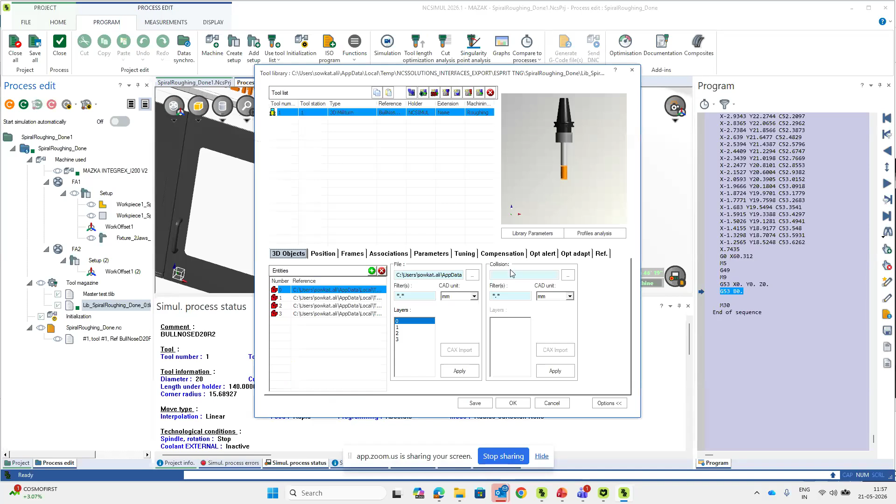Yes, this is a tool which we created inside ESPRIT EDGE, not in the NC Simulator. So whatever tools you have created, you can directly export it - you don't need to do any single changes.

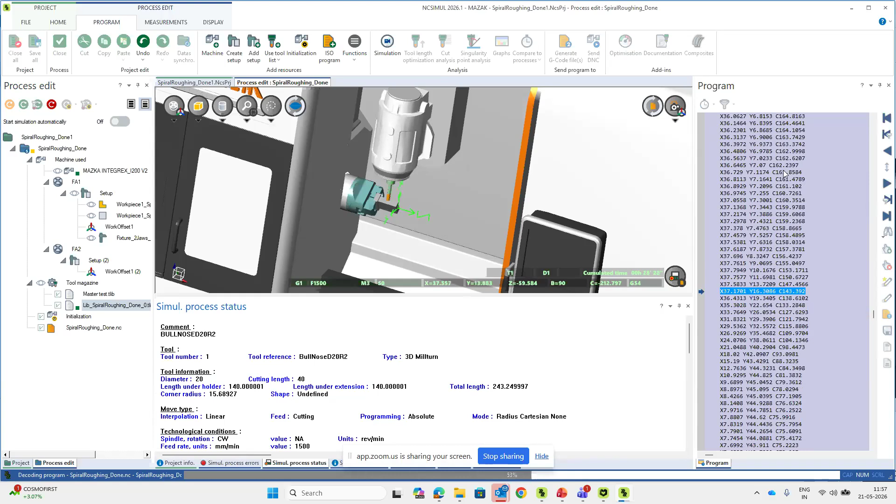So before you send this program to the shop floor, you can easily verify your program, because we know that the main input of our real CNC machine is our NC program. If there is any single mistake, it will directly affect multiple things - the part becomes scrap, the machine will have an accident, it will be a downtime. So many things will happen. So we can avoid everything once you verify the program in NC Simulator.

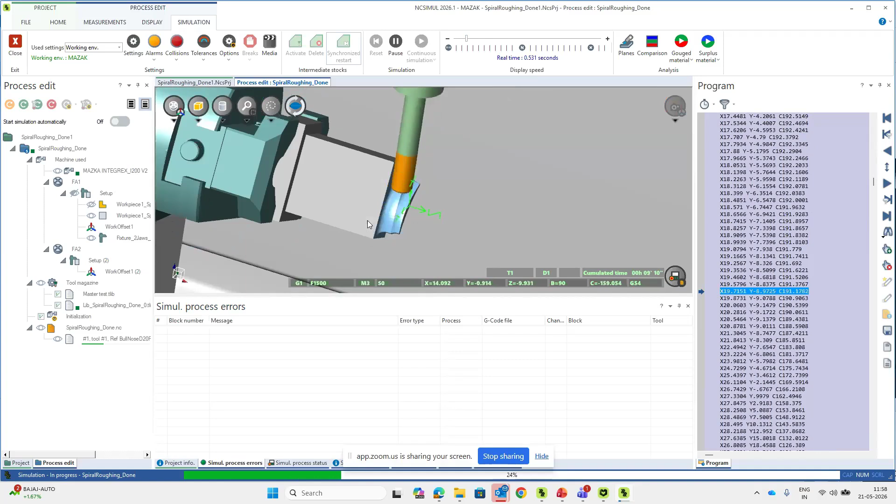So this is what we used to call the real simulation. That is a tool path simulation. You can get it from your CAM software, but the tool path, after you select your post processor and generate your NC, that NC is going to run a real simulation on your CNC machine. So we should understand what is the real simulation and what is the tool path simulation.

Real simulation is nothing but our G code based simulation, and whatever simulation we are seeing inside the CAM software, that is a toolpath simulation.

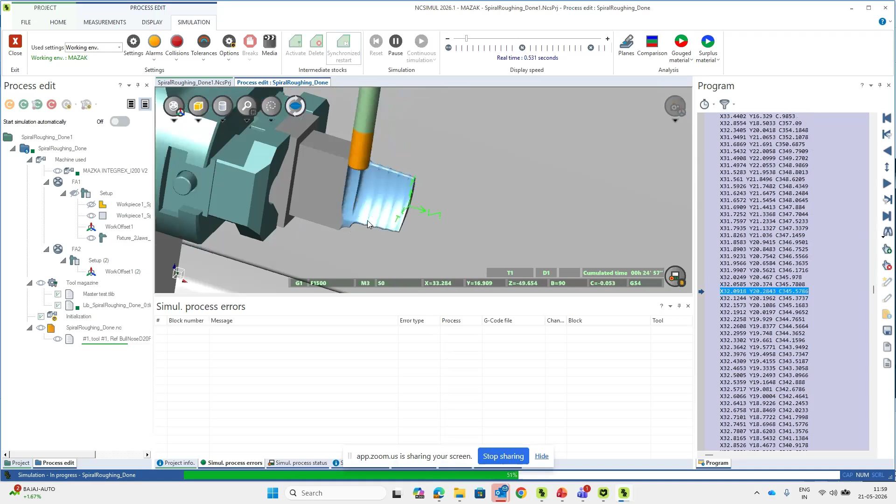It's not like our post processor will make mistakes that we can easily find. Our post processor is really good, but still we don't want any unwanted accidents or even a single mistake. Even one line of a program can make a huge impact in real CNC machining, so we want to avoid such circumstances, which is why we want to have simulation software.

It will really help to check the complete program, validate it, and verify it. You can send this document to the operator also, showing: this is the program, this is the simulation, so there won't be any surprises.

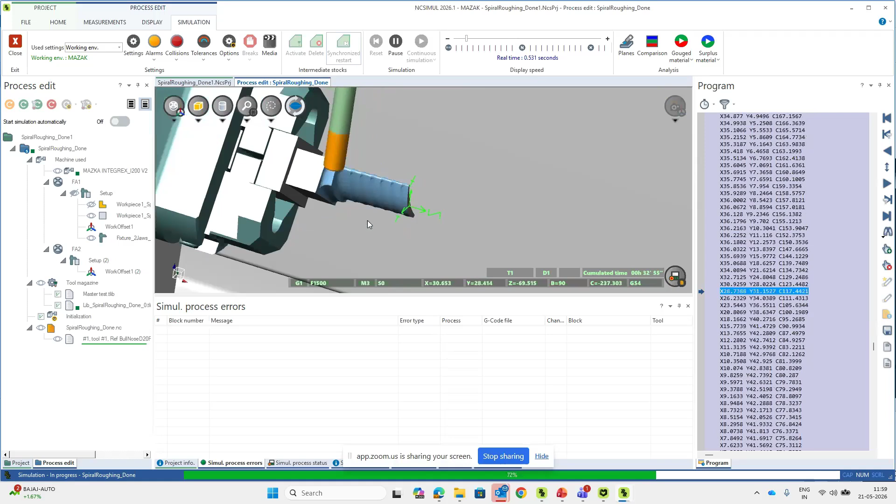You can run the program. You need to take the offset, select the proper tool, whatever I have mentioned in the program, then you can run it. It will not create any single issue.

Sometimes there are a lot of discussions between the programming team and the operating team. The operator will say, I did everything right, there is an issue in the program. The programmer will say, I have done everything, the operator did something wrong. So this is a kind of foolproof solution where both of them can agree, and there is no confusion.

There should be no data loss. Whatever argument you're making should be based on the data. If you have the data, you can easily show them this is what I did and everything I have validated, there are no issues in the program.

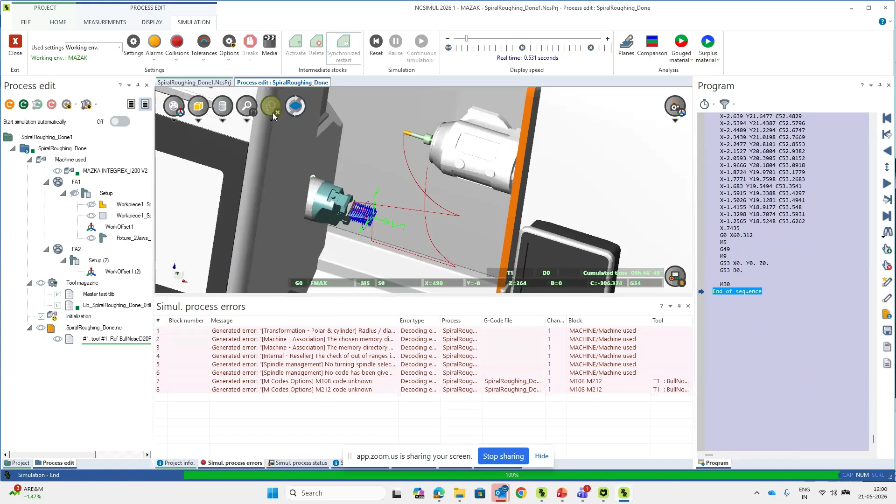This is really valuable because I know a lot of industries are using some competitor softwares as well, but NCSIMUL has a very good interface with all the CAM softwares, and it is a value proposition as well.

It is really going to save the machines which you have invested in crores. Without validating, many software scenarios have happened where accidents occurred due to program mistakes and the part became scrap. This might have happened previously, but people still ignore those situations and keep working at the same pace. We can avoid those situations.

Whatever CAM you are using, validate your program. That is the best practice, and you can safeguard your tool and machine, and also reduce machine breakdown time.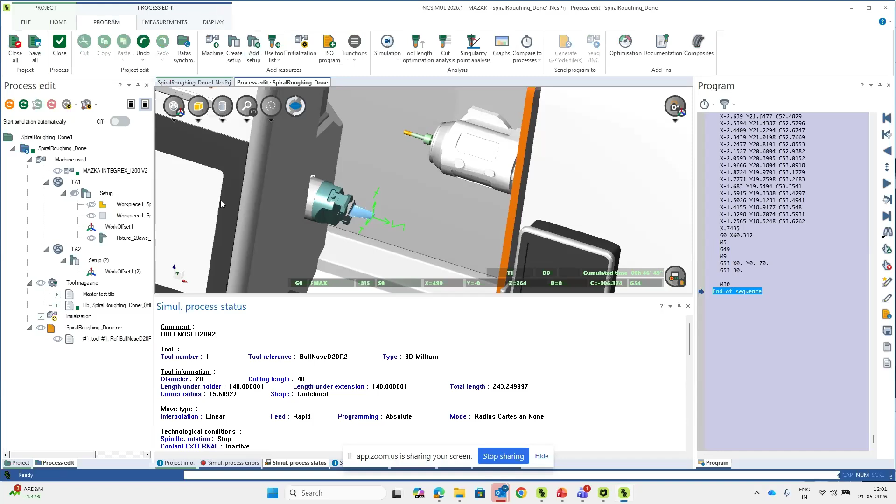You can keep running the machine up to 90-95% and get the output without any distractions. The working of NC Simul is also very easy. The training also won't take much time for those who are already programmers. Maybe 1 or 2 days, and they can easily get to know the workflow of how NC Simul is going to work, because our toolpath creation mostly happens with ESPRIT EDGE.

So we used to think a lot about what parameters we have to use, what tool we have to select for this machining. These are all things we consider on the ESPRIT side only. With NC Simul, we are just ensuring everything we did is on the right path, and that's what we are going to do.

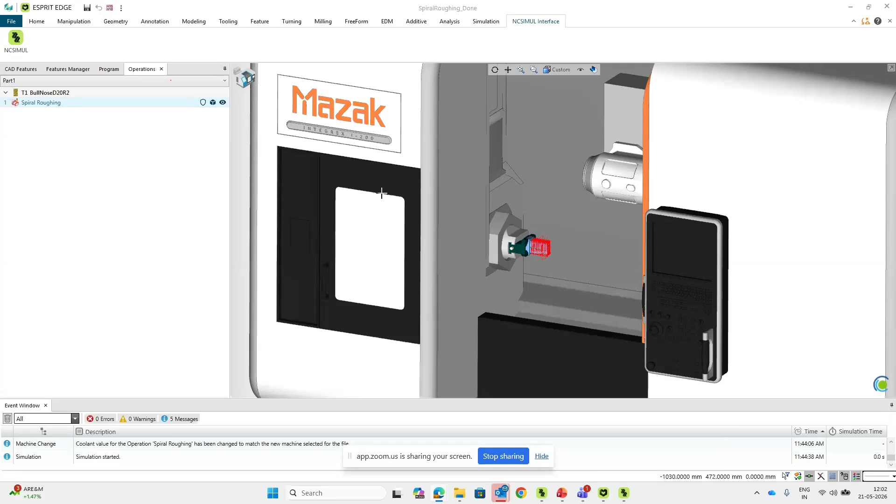As I mentioned earlier, Hexagon provides complete digital manufacturing solutions. It starts from the CAD software, we have a designer, the CAM software we have ESPRIT EDGE, and the simulation software we have NC Simul. We have a complete end-to-end solution available, as I said.

So for the post processor, maybe I will take another 2 minutes. I will just show the post processor. Just give me a moment.

So yeah, I think it's available. Okay.

Yes, here, this is our machine digital package. It means post processor library. In ESPRIT, you can see all the machines. So most of the machines, you can see in the library. It starts from whatever, some machines you might have heard of, some you might not have heard so far.

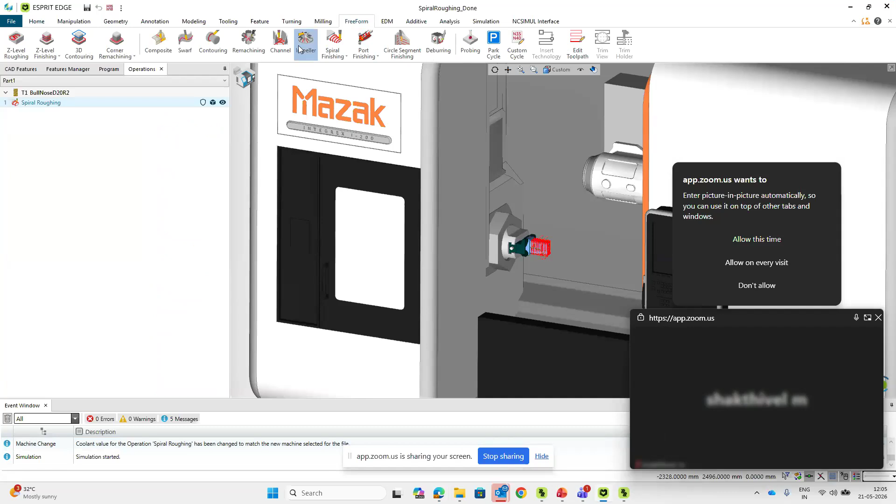So in today's webinar, we have seen what are all the 5-axis strategies available inside ESPRIT, with respect to different applications. Each application is having, you can see here, in terms of impeller, channel, or remachining. If you take about each topic, it will take much time. But our ultimate agenda is how ESPRIT, what is the capability of ESPRIT, and how the automation is going to drive in the future.

What automation is available inside ESPRIT. We have explained about this Copilot, as well as ProPlan AI, and also we have shown the complete digital verification through NC Simul, how NC Simul is going to help safeguard or protect your machine, validate your program, increase your machine uptime, and reduce your machine downtime. So everything is connected to that.

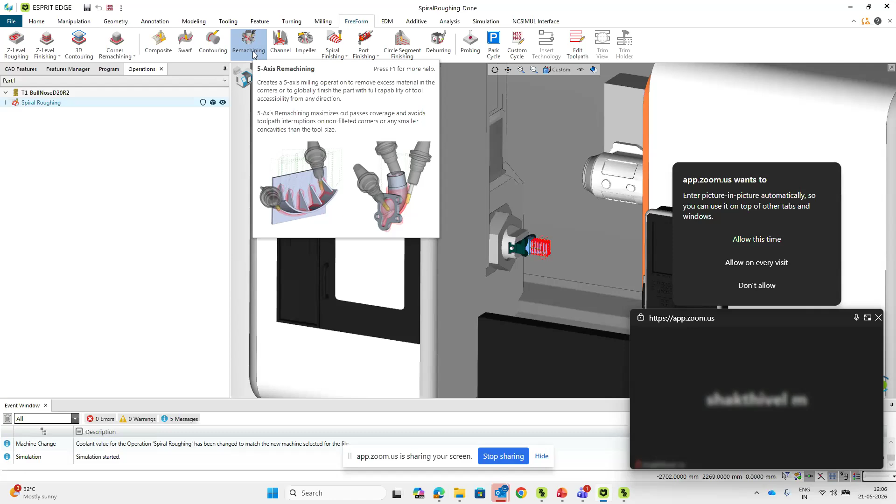What if I missed anything? No, I think I have covered most of the things. And not only for 5-axis, in 3-axis also we have a lot of automation. Quick toolpath generation is also available with ESPRIT, and definitely it's going to be the game changer in the upcoming years. We are very sure about that.